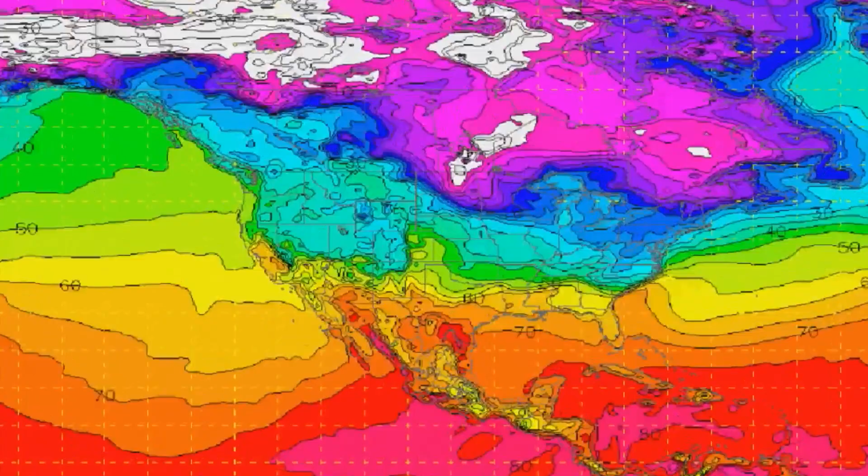In the real world, the answer to the question of can we see into the future has been answered with a resounding no. In our ever-evolving society, the trend today is to look toward the future by relying on predictive modeling to best predict the probability of an outcome. But we all know that even these well-thought-out predictions based on data often turn out to be not so predictable.

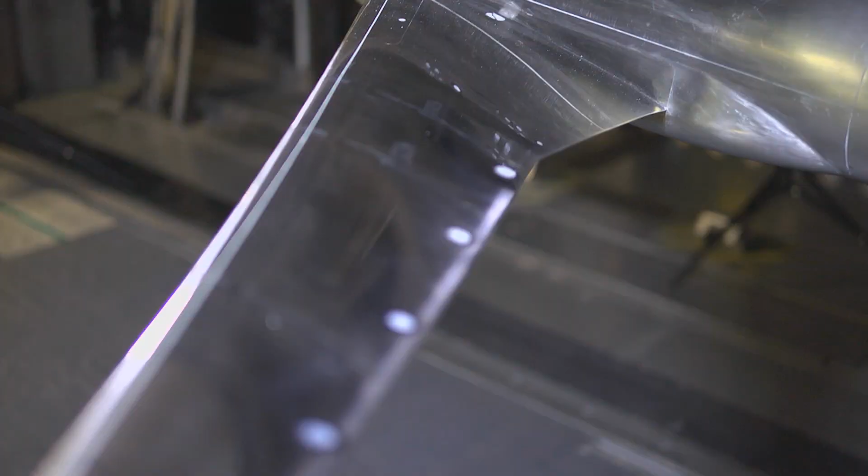Although it's clear that future events remain virtually unknowable, there is one group within NASA that comes as close as you can to seeing into the future. Throughout NASA's field centers, members of the Fixed Wing Project team are peering into the future every day and coming up with concepts that they believe will be on the next generation of aircraft. Because it takes years to plan and develop these concepts, the hardware and theories that are being tested today will be key components that enable the next generation of aircraft to take flight.

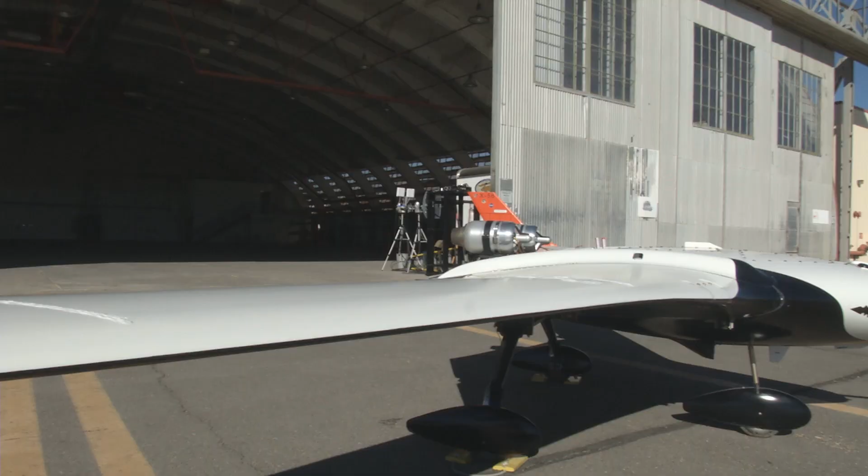On this episode of NASA X, follow us around the country as we visit members of the Fundamental Aeronautics Program's Fixed Wing Project, who are developing the framework that will shape how aircraft of the future will fly. Take a look behind the gates of NASA to see what some of these new ideas look like and how the engineers of NASA are paving the way for the ideas that will change the future of flight.

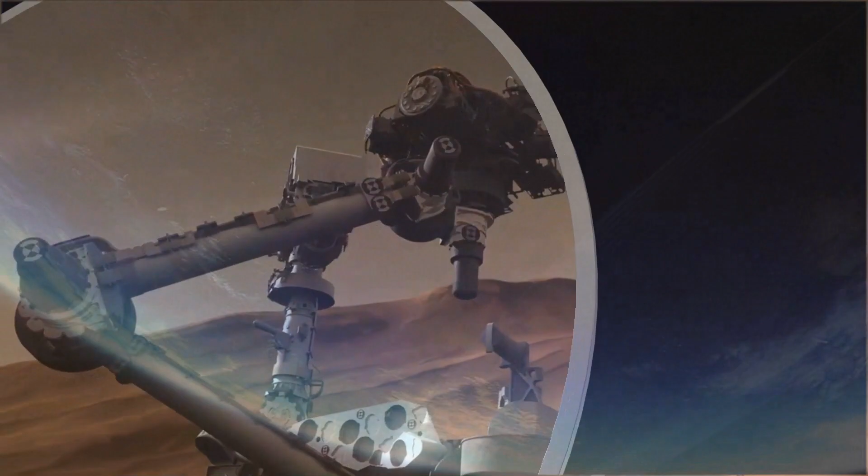To the untrained eye, most of the aircraft of today look very similar. This is because over the past century of flight, aeronautical engineers have worked hard to optimize passenger aircraft to the point where they are as efficient and safe as possible. As a result, the basic tube and wing shape has been configured and examined from every possible angle, making it the most efficient design possible today.

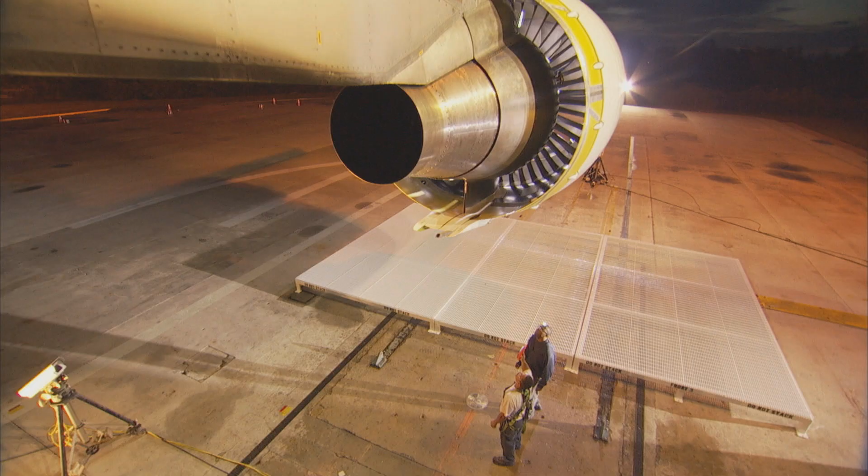Although aircraft have looked basically the same over the past few decades, if you look closely, you can see some of the major design changes. Wings that were once swept back more dramatically now are less so because of advances in aerodynamic shaping. Engines that spewed emissions by the ton are now much more efficient. Materials that were once so heavy that they significantly weighed down a craft are now much lighter and stronger.

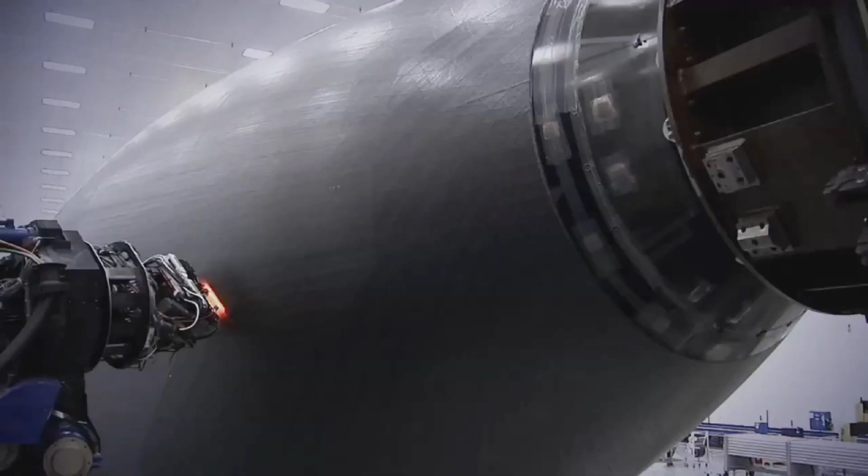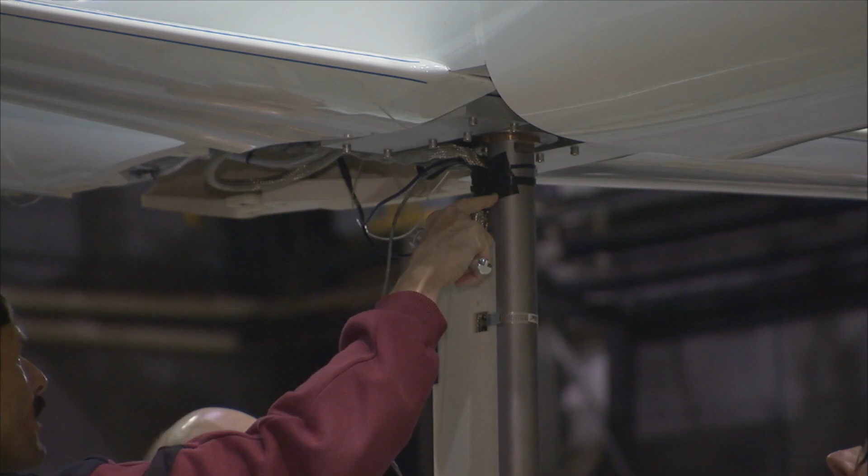With all this improvement and efficiency, it is fair to ask if there is anything else that can be done to make flight even better. The answer is of course yes. Behind the gates of NASA, there are scores of researchers who know that we can still make aircraft better because they are working toward these long-term goals every day. Some of these researchers from the Fixed Wing Project are working on so-called N+3 configurations and goals.

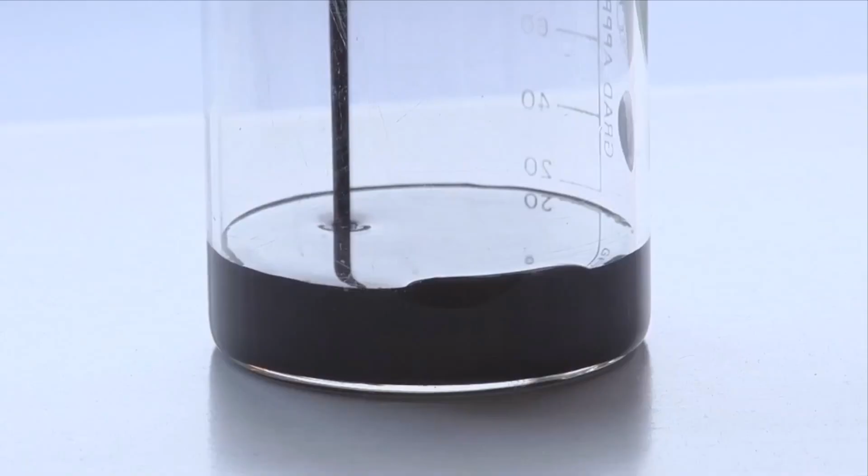In mathematical terms, the letter N is where you start now. N+1 is the next step. N+2 is just beyond that, and so on. Here in the Fixed Wing Project, N+3 equates to aircraft that will be flying in around the 2030-2035 timeframe. For this team, everything is on the table, including engines, fuels, wings, and fuselage shapes.

Well, we need to remember the first A in NASA is aeronautics. So it's the National Aeronautics and Space Administration. Aeronautics is the field of research for airplanes. The airplanes that fly today were researched and experimented on within NASA many years ago. So we're trying to continue that tradition, that important work that we have done for the nation and the world, for 20, 30 years from now.

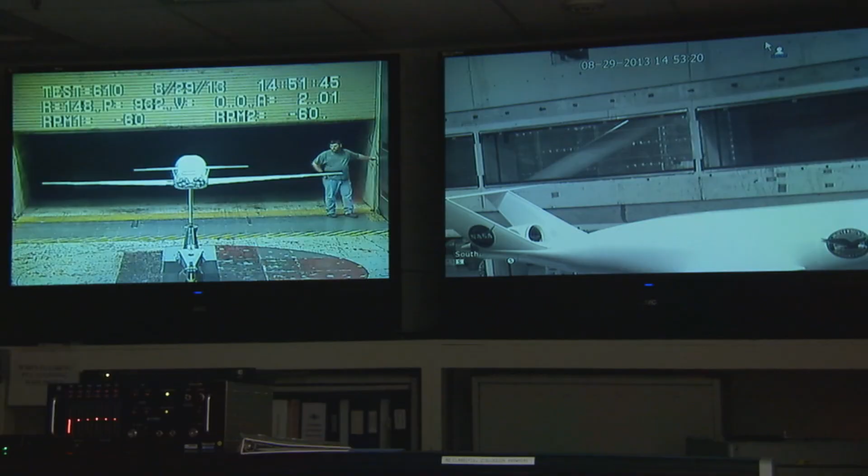Fixed Wing is a NASA research program where we are doing activities to try to improve the airplanes that we're going to be flying in the future. We're trying to make them less noisy. We're trying to make them better for the environment. We're trying to make them in a fashion that they will use less fuel.

The research we're doing is important because air travel is such an important part of your life. People travel, and even if you don't travel, cargo gets carried every single day. You use something every single day that gets carried by an aircraft. It's part of our way of life these days, and it often gets taken for granted.

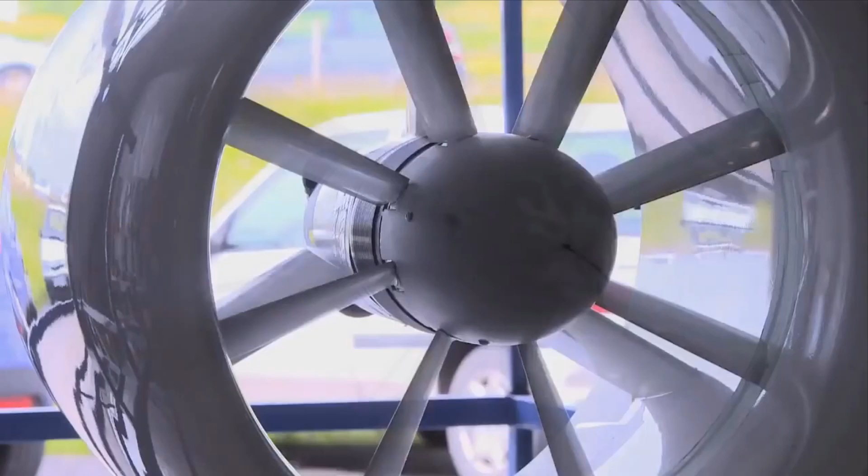There are challenges though, so we are focused on exploring and developing technologies and concepts to improve the energy efficiency and environmental compatibility of transport aircraft. With this mandate to significantly lower noise and emissions and increase performance for subsonic aircraft, there will be a need to address virtually every aspect of the current aircraft configuration, including developing new materials and engines, testing alternative fuels, and even changing the fundamental shape of the aircraft.

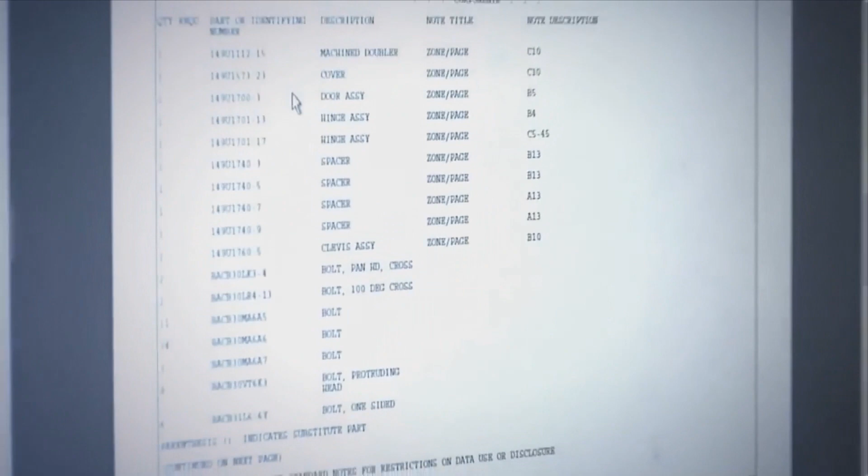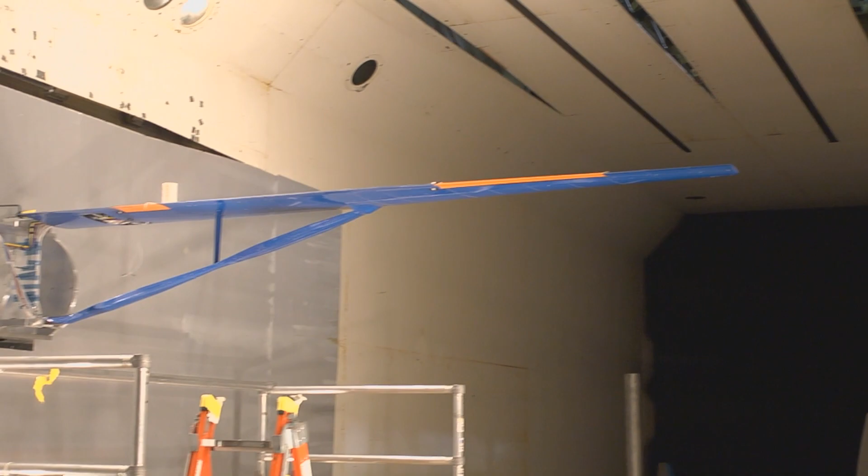All across the country, fixed-wing researchers are doing just that. Major advancements are being made into the understanding of how future aircraft will fly. Because there are so many areas of study, let's first look at something that has the potential to be used today as well as in the 2030 timeframe: alternative fuels.

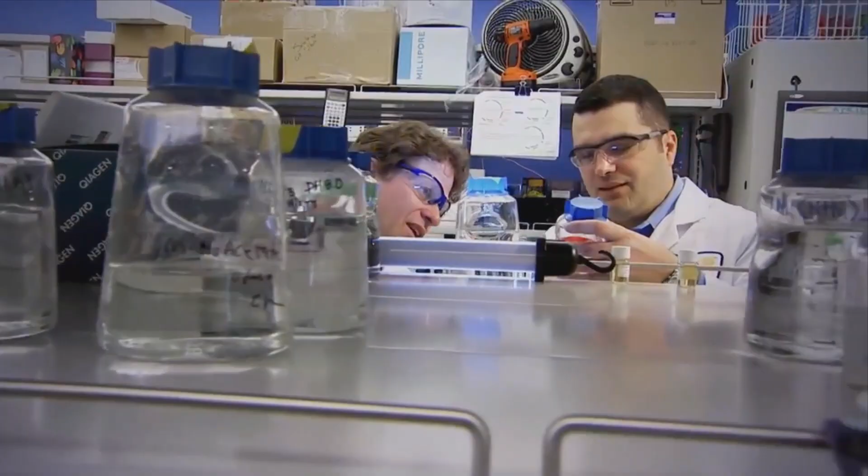On this beautiful morning at NASA Dryden in California's high desert, a test called ACCESS, or the Alternative Fuel Effects on Contrails and Cruise Emissions test, was performed to study the effects of alternate biofuel on engine performance, emissions, and aircraft-generated contrails at altitude. For this test, 2 aircraft were flown in tandem. The first is NASA's DC-8, which will be burning an alternative fuel.

The second aircraft is NASA's Falcon that will fly directly behind the DC-8 to measure and characterize the emissions coming out of the engines from the alternative fuel. Here is NASA's Bruce Anderson to explain. NASA's role is in assessing the combustion characteristics of alternative fuels, as well as determining how these fuels will affect the performance and emissions from aircraft.

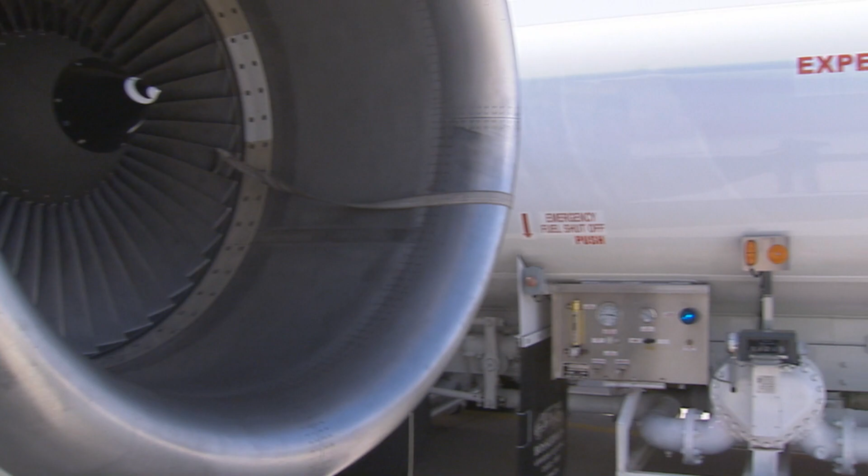To understand how aircraft affect the climate, we need to make measurements at cruise altitudes. So the focus of ACCESS, or the alternative fuel effects on contrails and cruise emissions, was to fly behind the DC-8 in flight and look at its emission and contrail characteristics as we changed from standard jet fuel to a fuel that was a blend of a fuel made from camelina plant oil, and also added 50% of Jet A to that.

There are some other groups out there. Tyson Foods is making a biodiesel and biojet fuel from chicken fat that they sweep up on the processing plant floors. So there's a number of different ways of making these alternative fuels. All of them result in a fairly clean kerosene that doesn't have nearly the contaminants in it that the fuels from refineries do.

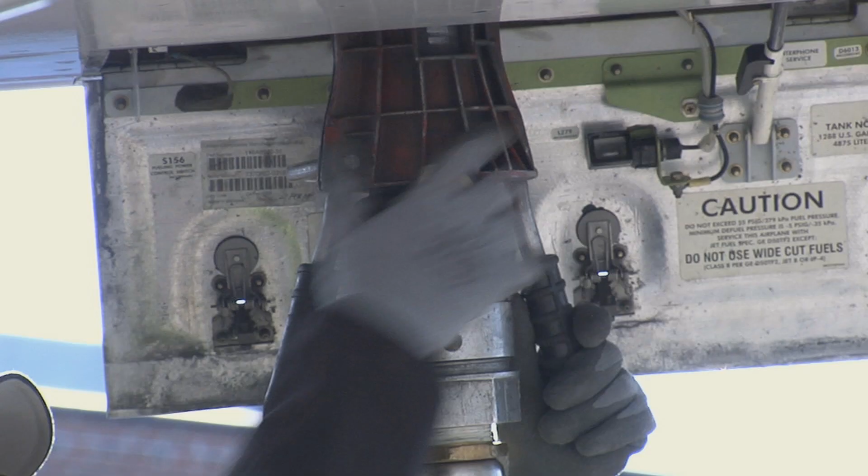The fundamental thing is the aircraft has to retain its performance characteristics when you burn a fuel. You can't have any drop in power. The fuel also has to have similar characteristics in terms of density and volume to kerosene. So what we're looking at is drop-in fuels. A lot of the fuel systems on the aircraft are designed to rely on the aromatics in the fossil fuels to swell the seals to make them leak tight.

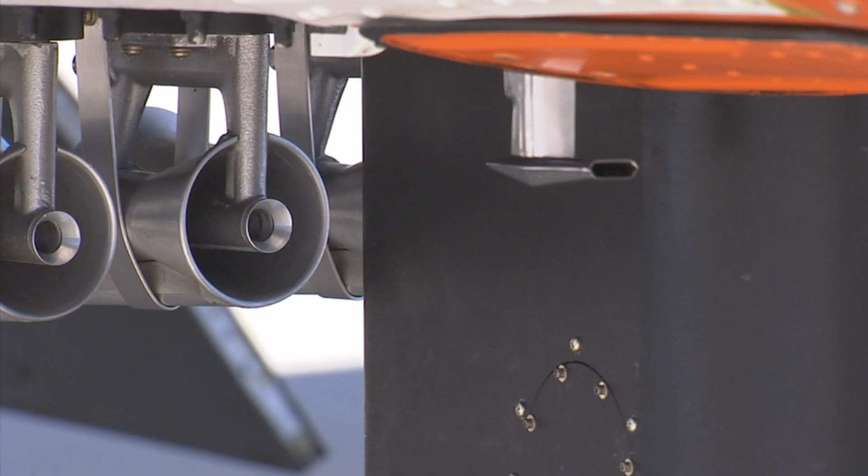So when we fly an alternative fuel, we have to mix it with standard fuel to retain those properties. Otherwise, the fuel would just leak out of the aircraft. And then the second thing we're looking at is just the emission characteristics. By that I mean the amount of pollutant generated per kilogram of fuel burn.

After the first few flights, it was shown that using these types of alternative fuels could significantly reduce emissions at cruise altitudes, particularly soot emissions. Work continues to better understand how to use these fuels and how to make them even more efficient for future aircraft.

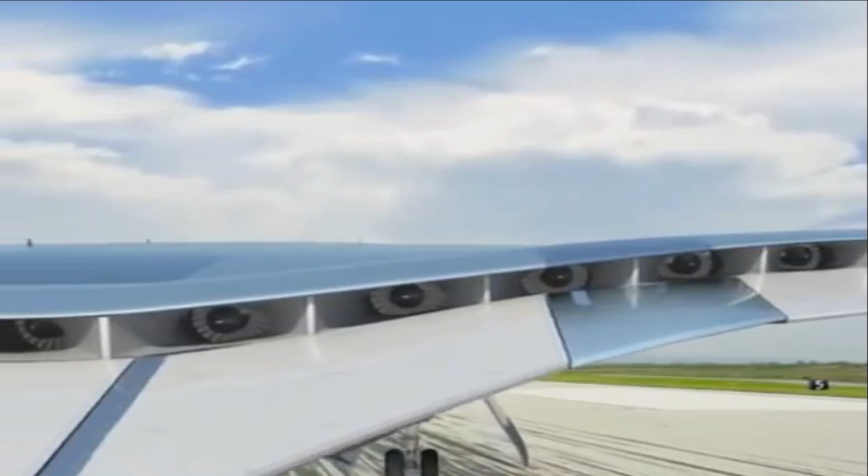Other than alternative fuels, there are some other ideas out there for finding more efficient ways to power aircraft. If we look on our roads today, many of the cars that are now being driven run on a combination of fuel and electricity. The idea that aircraft could do this seemed far-fetched only a few short years ago, but today, this idea is gaining traction. There are several ideas on how to do this, so let's take a look at a few.

Here, a team is looking over a new Boeing aircraft design called SugarVolt. This unique design has several interesting changes, like the truss-braced wings that have the potential to reduce the drag of the wings by making them longer and thinner. Because thin, long wings have the tendency to flex more, designers have included a clever, efficient truss structure to support them. This design has the potential to reduce drag and weight, thereby making the craft more efficient to operate.

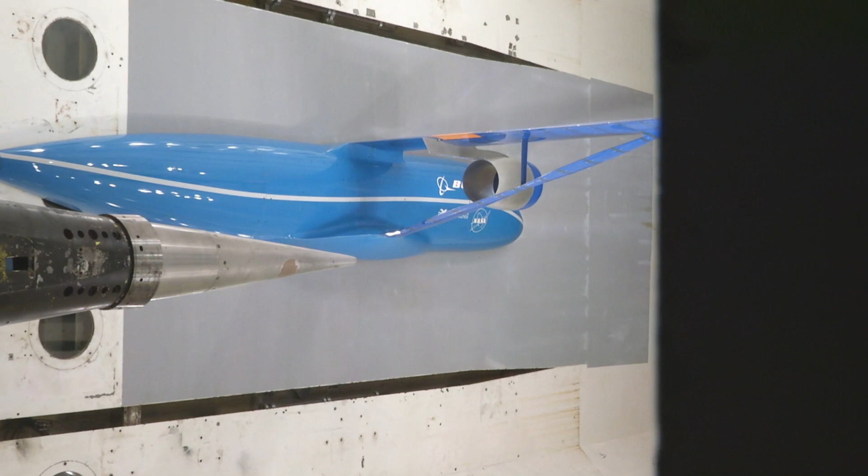At first glance, those unique structural changes may look like the biggest game changer for this type of aircraft, but the Sugar concept holds another surprise as well. In the case of the Sugar concept, what's less obvious to the eye when you see it is that it has an unconventional propulsion system. It's a hybrid gas-electric concept that's closer to what you see in a Prius. It has batteries and a gas turbine engine technology.

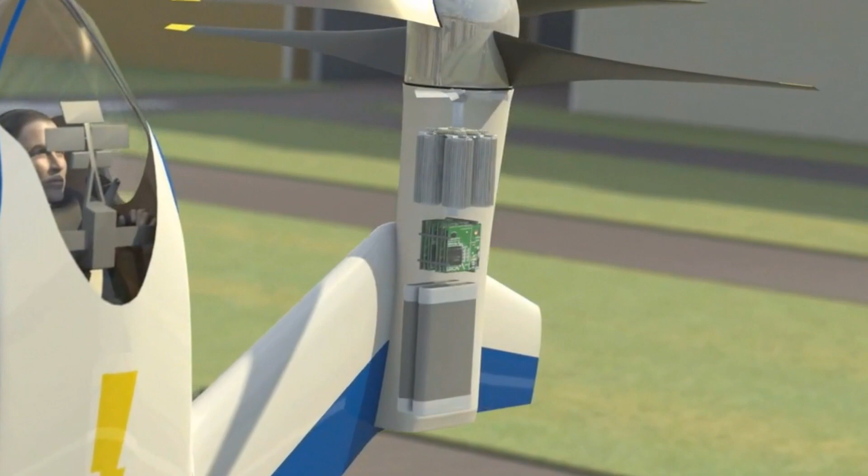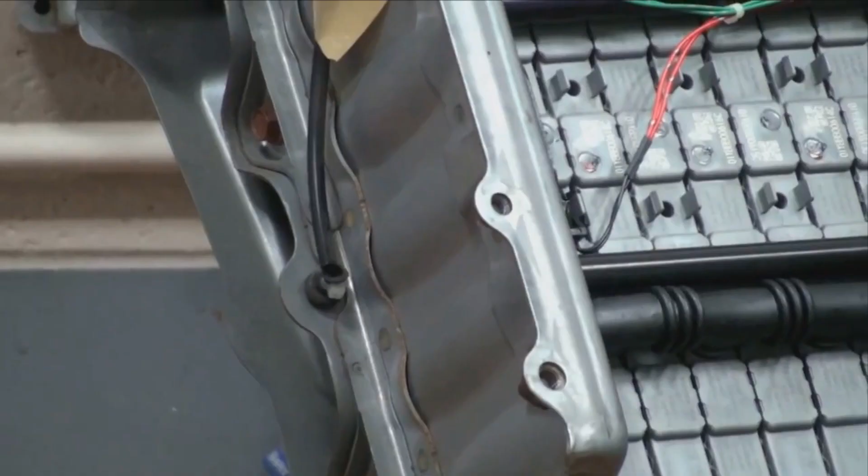It requires advances to battery technology, but those are happening throughout the world independent of the aerospace industry, and we're trying to leverage that. We do it on cars, we should be able to do it on airplanes eventually. The challenge is to take those batteries and have enough energy or power content and have them be lightweight. Where we are today, I think, is we're at the dawn of the age where we can start to see electric propulsion or hybrid electric propulsion.

And you'll see it on smaller aircraft first before you see it on the large commercial transports. But that's what we're working towards. That's good for cleanliness, it's good for noise, it's good for energy efficiency. It has its challenges, that's why we're working on it, and that's why it's not being done today.

The idea behind this vehicle is to have its twin engines burn fuel when great power is needed, like at takeoff. But when the craft is in a cruise configuration, a switch can be made over to a battery electric mode to supplement or even replace power to the engines. If successful, this could reduce the amount of fuel burn by up to 70%.

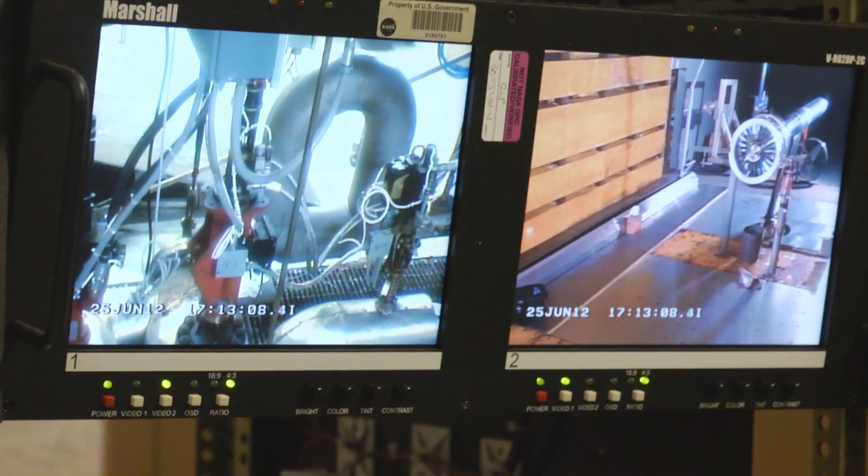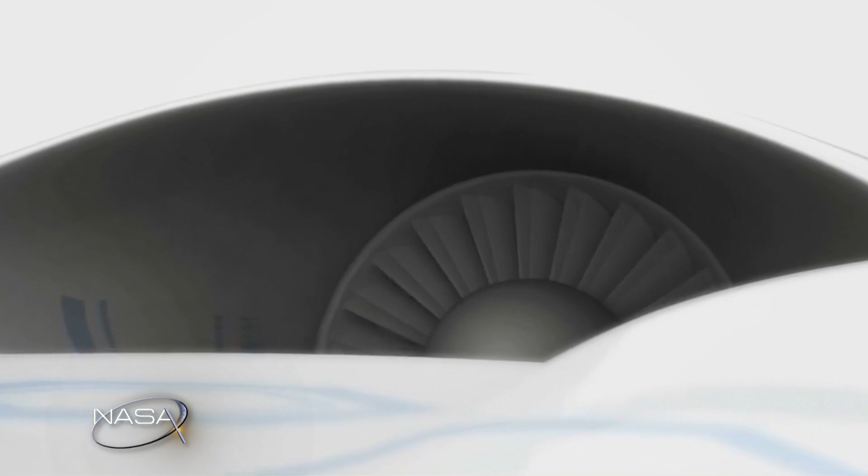Another concept called turbo-electric propulsion is being studied here at the NASA Glenn Research Center. Here is NASA's Jerry Brown to explain. There's not been electric airplanes except in very small size. And the reason is that electric motors and generators tend to be too heavy for flight. We're hoping to change that, and we're hoping to get a benefit from saving a whole lot of fuel in the process. The type of electric propulsion that we're talking about today is turbo-electric propulsion.

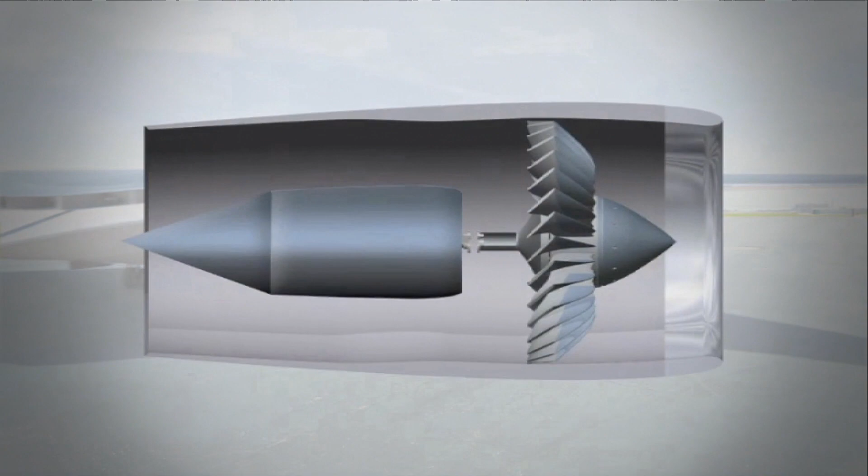We're going to keep the turbine engine because it's really good as far as a lot of power in a small power plant. And then we're going to use its power to drive a generator, send electricity to motors that drive fans that do the propulsion. This concept will look very different from vehicles of today as well. Potential designs include 2 large turbine engines on the wingtips that will drive 2 large generators inside the body. The generators will in turn power a number of fans, providing the propulsion the aircraft needs to fly.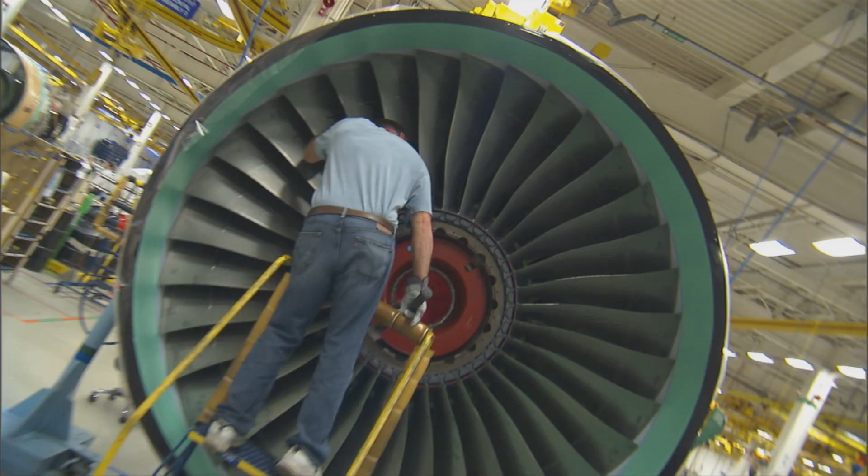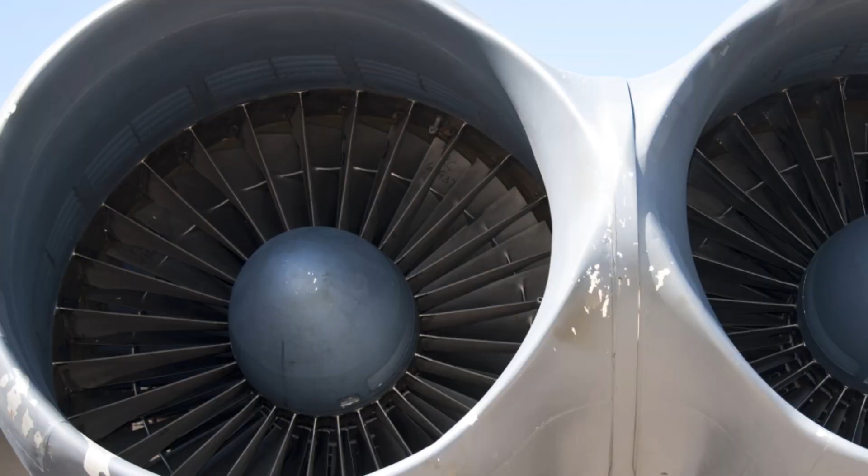What we want to do here is we want to be able to break the turbine engine from the fan, and that gives the aircraft designer a lot of freedom. If he can move the turbine engine somewhere else in the airplane, that may itself have advantages. The engine and the fans don't have to turn at the same speed. You don't even have to have the same number of fans. And that's what we're really looking for, is we want to have an array of a whole bunch of fans, maybe 15 of them, say, and just 2 engines. You like to keep just 2 big engines because the big engine is much more efficient.

This idea is intriguing, but big changes need to be made to make it viable. One major challenge is the need to reduce the size of the generators, because the generators of today are way too big to fit on an aircraft. One idea that the NASA team is looking at is a way to remove the current type of copper windings in the generator and replace it with superconducting material. This change would allow the generators to shrink, making them viable to fit on future aircraft.

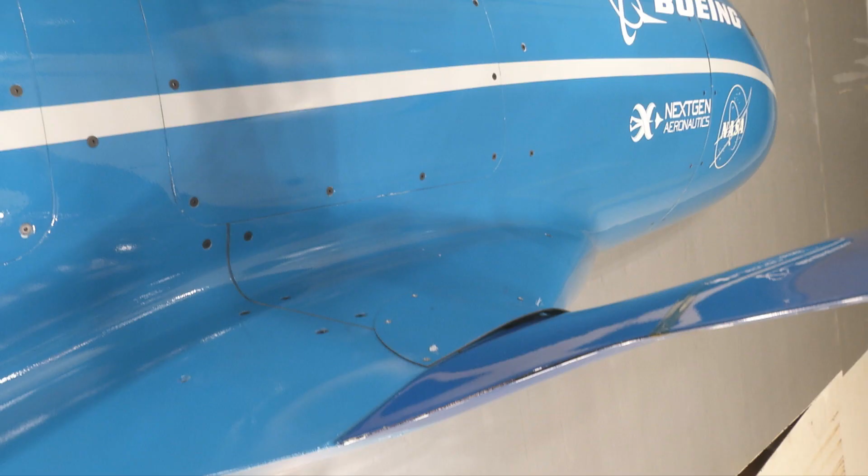As we've seen so far, new aircraft designs are coming online that have the potential to greatly improve aircraft efficiency. Another of these revolutionary designs has come out of a joint MIT and NASA study. This unique design is called the double bubble and has the potential to reduce fuel burn by up to 70% as well. So the MIT D8 double bubble design was something we've been working with MIT for a number of years on. The idea there is to take some of the lift that you would normally get from the wings and try and move that to the fuselage.

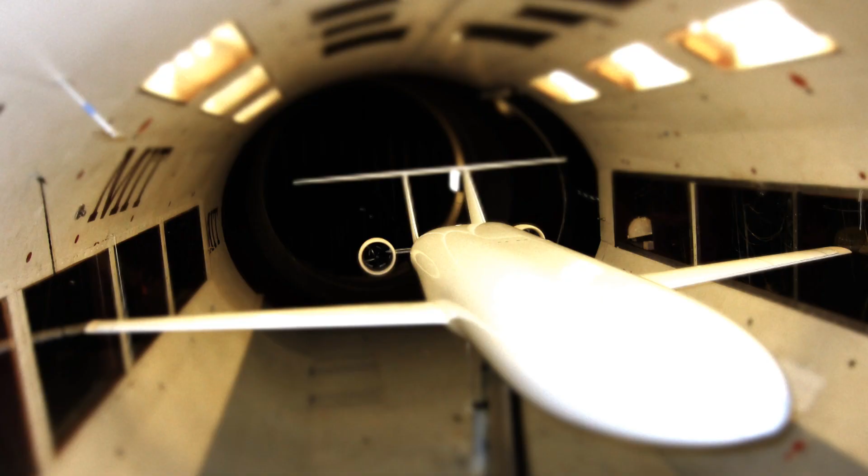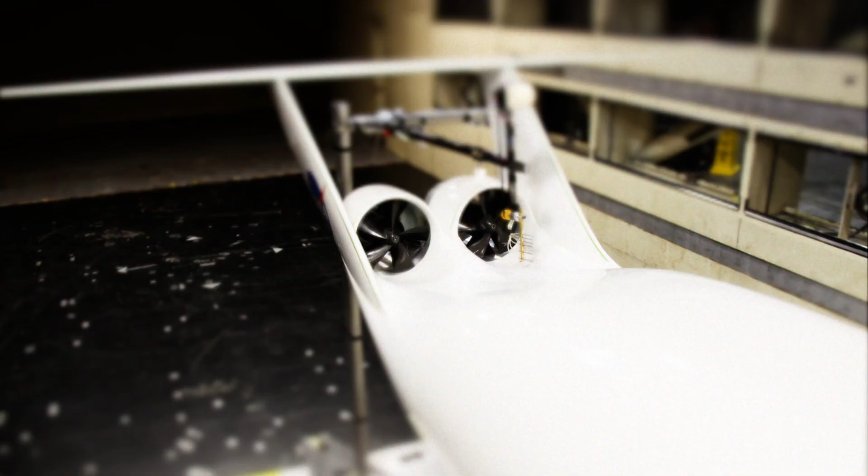It has 200,000 processors working on the problem if you use the whole machine on one problem. So it's a very large machine, and we need that very large machine because we need to do very big problems here at NASA. The Aeronautics Research Directorate that we're using it for is to try and simulate the flow over these N+3 configurations.

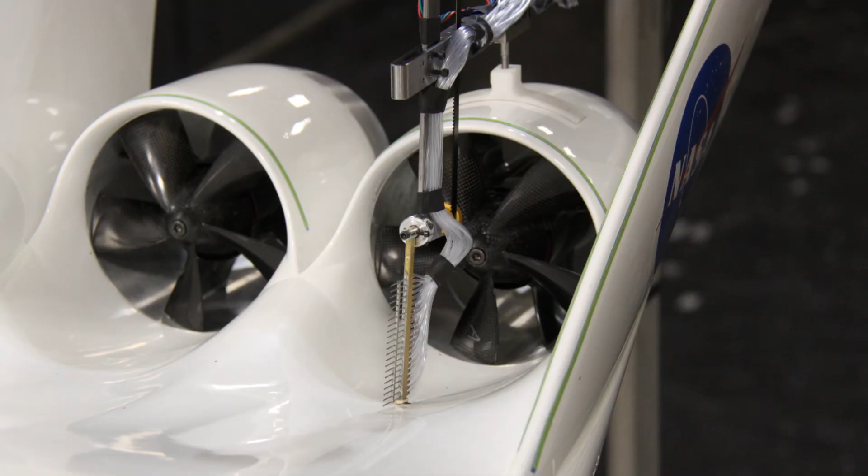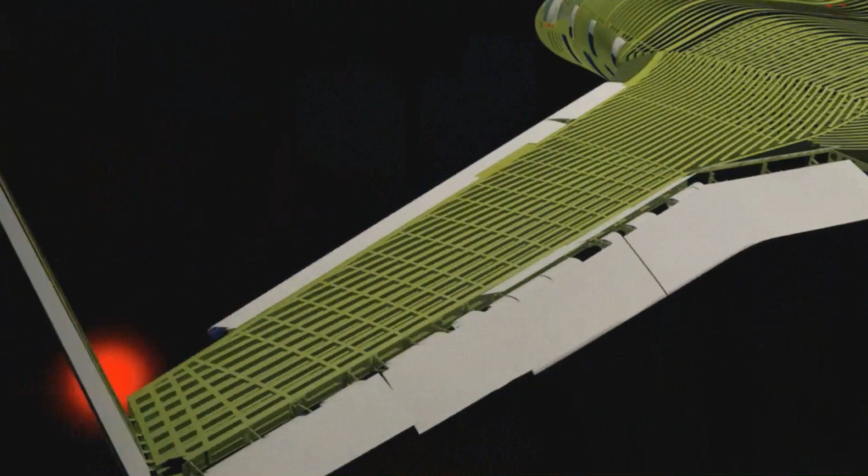So in order to capture all the detail you'd see on a vehicle like this, including what's going on inside the combustors of the engines and things like that, you need to have a lot of grid points to resolve all the fluid motion inside those engines, over the airplane, and having that many grid points to resolve all that physics in 3 dimensions creates very large computational grids that require very big machines to advance the equations that govern the fluid motion and get these CFD, computational fluid dynamics solutions that we use to make our assessments.

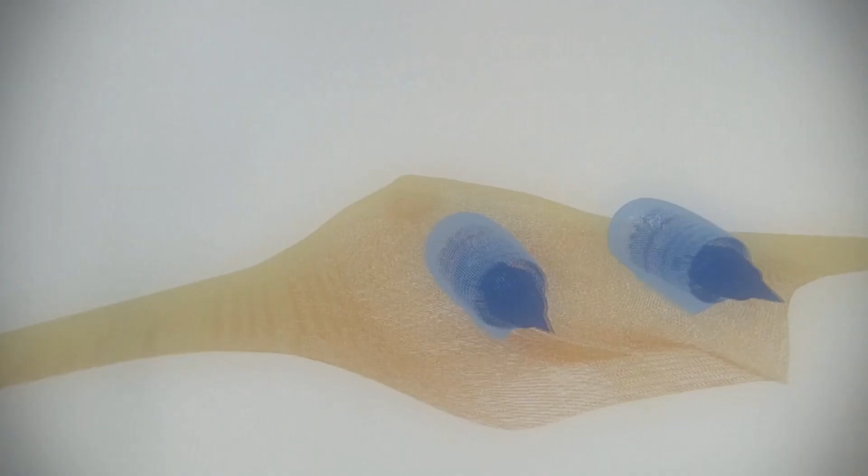Aerodynamicists of today are able to model ideas on computers, which allows them to test many different configurations before a wind tunnel model is ever built. Once a design is agreed upon, a wind tunnel model can then be fabricated and tested. This process was used for the double bubble as well, but the wind tunnel test showed surprising results.

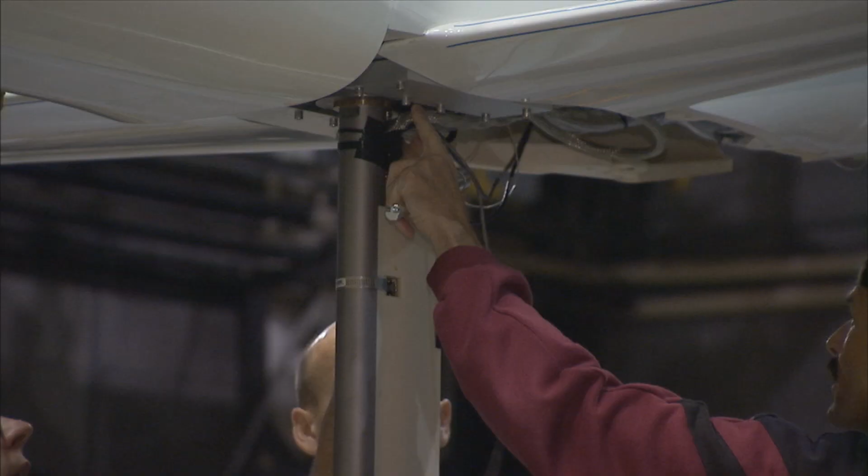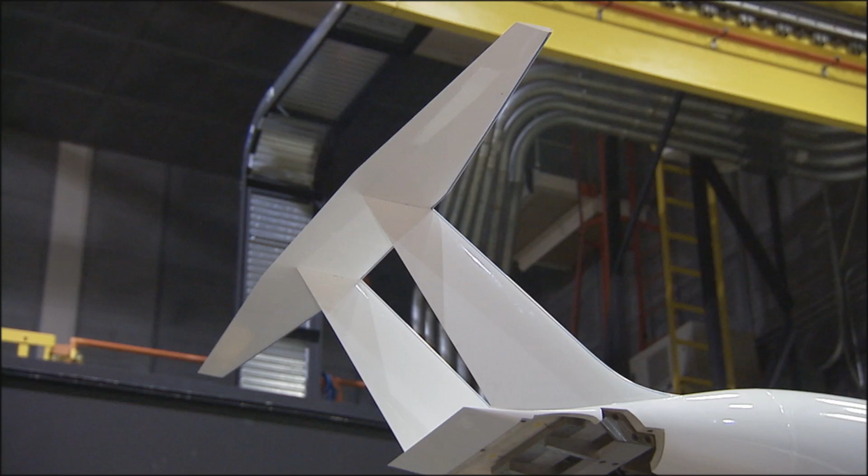The good news is that we've just completed the first test of this configuration in the Langley 14x22 wind tunnel at NASA Langley, and it showed even a greater reduction or a more fuel efficiency benefit to this technology than we had predicted on paper with our low-order models. So we're trying to digest the experimental data that show this nice benefit in fuel efficiency from this configuration.

At the same time, we're also using the supercomputer here at NASA Ames, the Pleiades supercomputer, to do computational fluid dynamics CFD runs of these same configurations and see if we can confirm that benefit on the computational side as well. Testing will continue on the double bubble, and if the results hold, you may see this type of aircraft at an airport near you in the future.

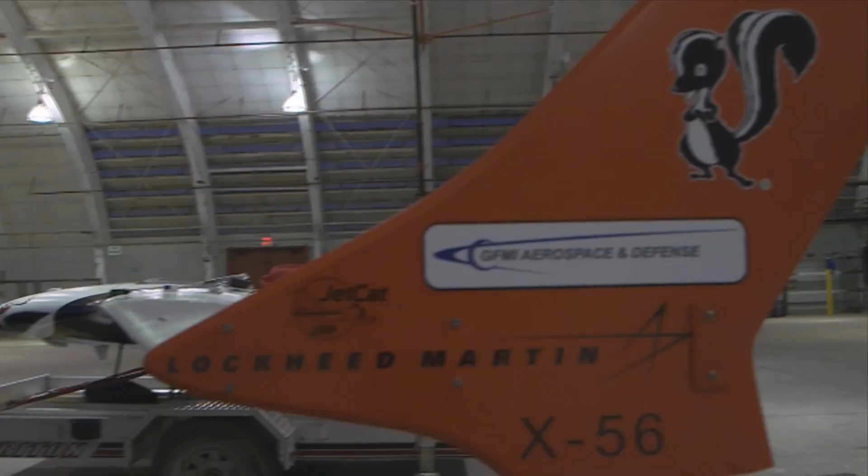When testing aircraft, many different stages occur. We have already mentioned CFD and wind tunnel testing, but another tool in testing future designs is to build a flying scale model. Although CFD and wind tunnel modeling is the mainstay, often test flights of these small, scaled-down versions of an aircraft offer some of the most dramatic results for researchers. That is the case with this aircraft, called the X-56. This aircraft is being used as a test bed to understand how different wing configurations work and how a unique idea called active control may be used in the future.

The whole concept behind the X-56 is that they've long known that a very long wingspan vehicle is more efficient than short wingspan vehicles. Problem is though, when you get a very long wingspan, you start to get into issues with flutter modes that start to creep into the vehicle, so the wing will go unstable and in extreme cases will rip off the vehicle. To get around that problem, you can use active flight controls to suppress those flutter modes.

Active control is you put things like accelerometers within the wing, and as soon as you sense that the wing is starting to get into these flutter modes, you use the control surfaces behind the wing to damp that out. So the airplane, as it's flying, is continually fighting these modes and keeping the wing straight and stiff. Then you can build a lighter, longer wingspan vehicle that is more efficient.

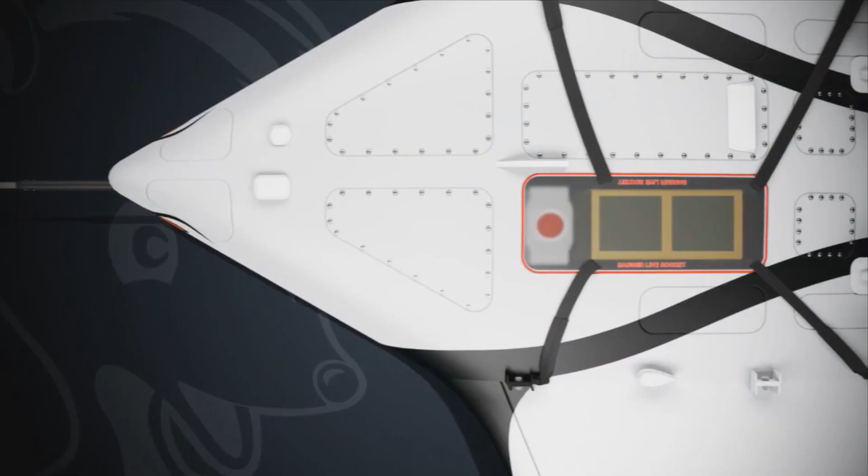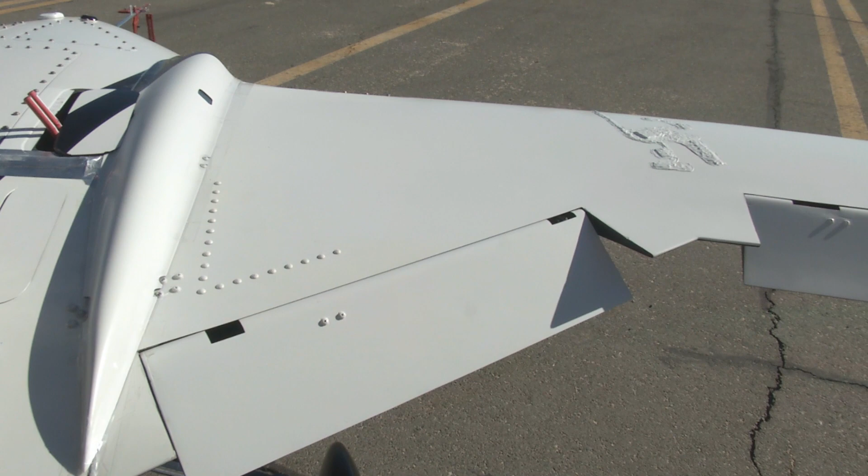This vehicle, as funded by the Air Force, was built as a multi-utility technology test bed. They call it the MUTT for short, and it is built to do a lot of different kinds of testing in aeronautics. The wings are removable. You can put on a stiff wing, you can put on a flex wing, you could do a joined wing configuration. We can learn quite a bit from testing this kind of vehicle. Right now, the focus is on flexible wing and active control of flexible wings, but in the future, there are many experiments that can be done with this vehicle.

The research on the control of lightweight, flexible wings being performed today on the X-56 is key to enabling the long, thin, low-drag, and low-weight wings of tomorrow's N+3 configurations. Much is going into understanding what it will take to improve the already incredibly efficient aircraft of today into ultra-efficient vehicles of the future. Although we don't have all the answers yet, it's clear that NASA and its brilliant engineers and researchers are helping to lead the way to a safer and more efficient way to travel.

We are nowhere near the maximum that we can get out of this industry. And there is a lot of work to do, and that's what my team is doing. That's what we're doing within NASA, and I cannot wait for the future.